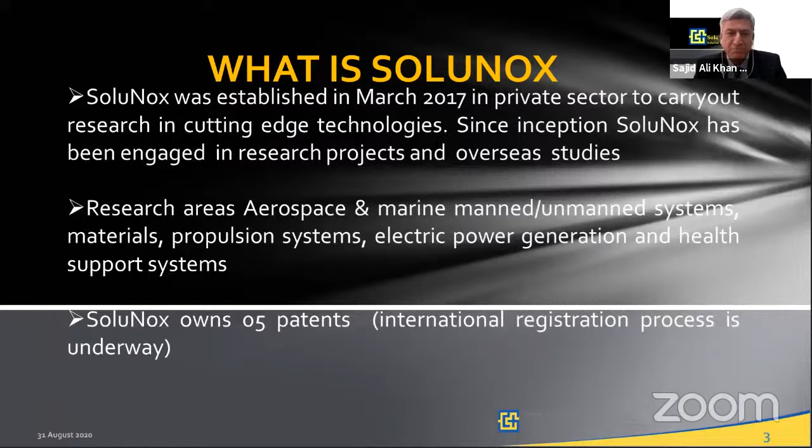SoluNox was established in March 2017 in the private sector for research in cutting-edge technologies. Since inception, SoluNox has been engaged in various research projects and overseas studies. Our main research areas are aerospace and marine unmanned systems, materials, propulsion systems, electrical power generation, and health monitoring support systems. At the moment, SoluNox owns 5 patents, and we are in the process of getting them registered internationally.

Coming to your question about how we started the process of establishing this company - before that, we were stepping into cutting-edge technologies. We had to analyze what all major companies in the related field have progressed from scratch. We studied and analyzed those companies, and collected a lot of knowledge sources of research materials, patents, and online libraries. We also took membership in professional organizations - as I mentioned earlier, we're a member of the American Society of Mechanical Engineers, American Society of Testing Materials, and the Royal Institute of Naval Architects, UK. SoluNox is also a member of 3 committees for formulation of standards at ASTM.

Moreover, to strengthen our company, we have concluded R&D collaboration agreements with universities, academia, and other companies across 3 continents. We have contracted technology partnerships, mainly strategic ones, based on sharing our research together. We are now registered as a supplier in some of the renowned aerospace directories, giving us direct access to companies globally. We have also networked into industry, since the type of industry we are working in needs a lot of precision and very dedicated design processes.

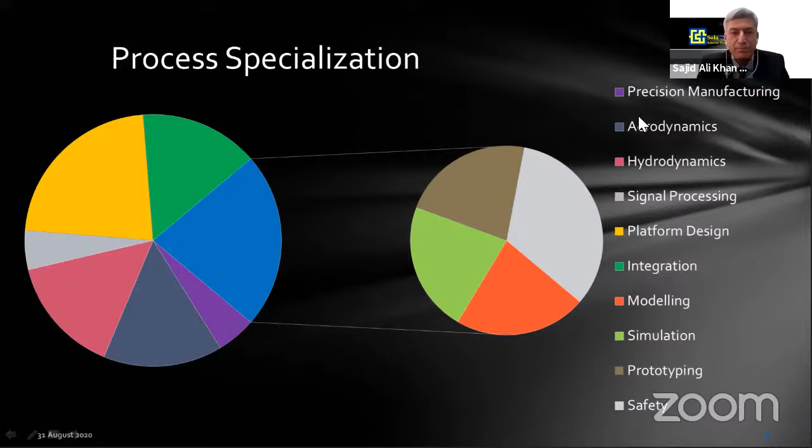Regarding some technical specifications in our process - our major products are smart products. We have focused our attention on propulsion systems, automation and control systems, and system integration. We have process specializations since we involve precision manufacturing. We have developed expertise in aerodynamics, hydrodynamics, signal processing, platform design, integration, modeling, simulation, prototyping, and in the end, most importantly, the safety of all these systems.

Now coming to your second question - how I started this process in aerospace despite being in the Navy and serving in submarines. Just for your information, I started my career as an aeronautical engineer, but somehow a turn of events took me to the Navy, and eventually I ended up getting commission in Pakistan Navy, then joining submarine service. The submarine service itself is a cutting-edge technology. So in a way, I'm working at the moment on 2 extreme technologies - aerospace and submarines. Everything else in between is mediocre technology in that sense.

As for how I came into developing gas turbines and everything - our study did not start all of a sudden. We have a team who have been working for quite some time, but in their own capacities, in gas turbine technologies or aerospace technologies. Our main effort was to bring them onto one platform under SoluNox. Specifically for the turbines, the complete process started just 6 years ago for micro gas turbines. Before that - in the next slide I'll show you the historical perspective and share how micro gas turbines evolved.

My next question will be more specifically about what micro gas turbines are. Can you please explain it for the interest of the audience who are laymen, and for someone who has a bit of knowledge about these systems? Can you also throw some light on the manufacturing process?

Just for the start, I'm sure all experienced people from aerospace are sitting here, and as you said, maybe some are not related to this engineering background. Basically, a gas turbine is a heat engine with continuous flow, in comparison to reciprocating engines which use pulsating flows. This type of engine has a compressor, a turbine, and a combustion chamber, where heat is applied through fuel injection, and new methods are coming for adding heat to the combustion chamber.

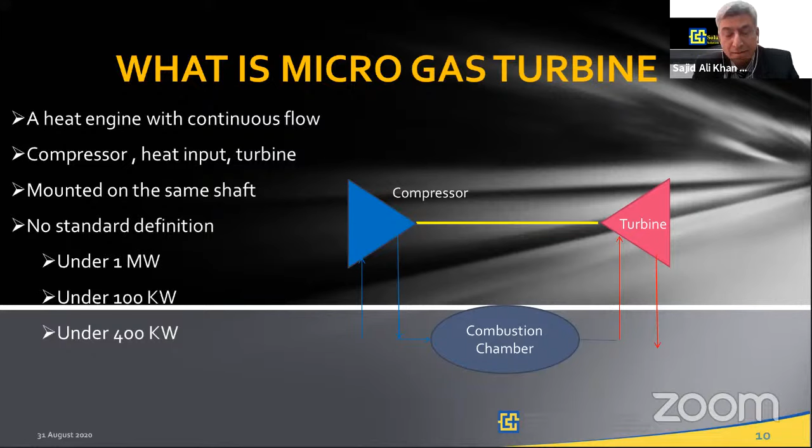In this type of engine, generally they are mounted on the same shaft. Micro gas turbines generally are mounted on the same shaft, and that is why they are popular in this part of the aerospace world. At the moment, there is no standard definition of a micro gas turbine. Initially, under 1 megawatt was considered a micro gas turbine, but this definition was subsequently worked out by many engineering associations and countries. So at the moment, a turbine under 400 kilowatts is graded as a micro gas turbine.

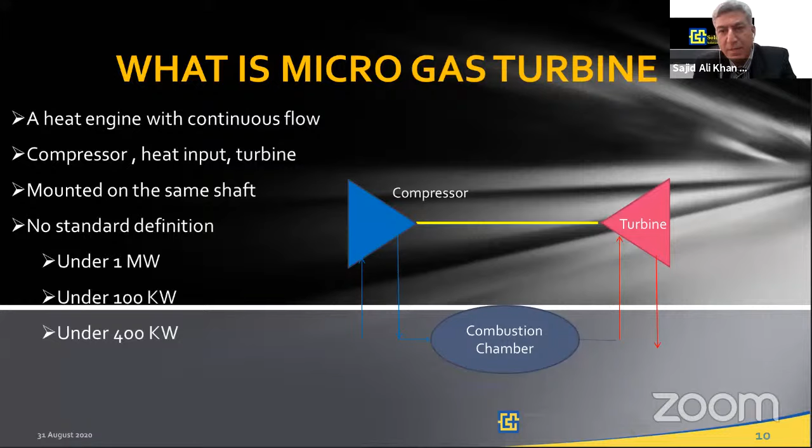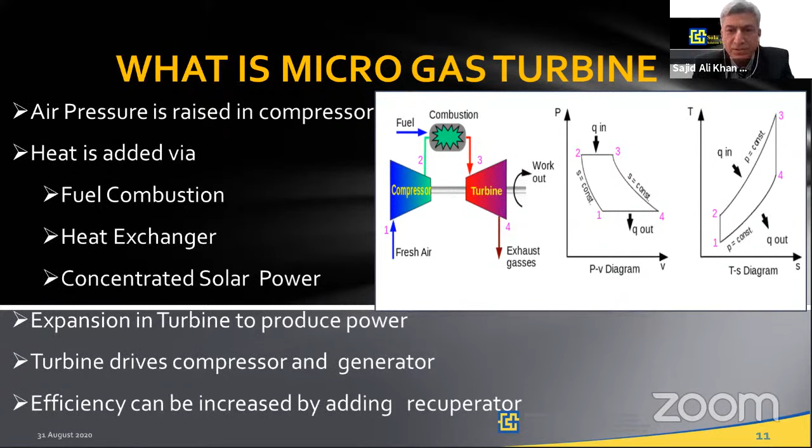This turbine drives the compressor and generator. The efficiency of these turbines can be improved by a recuperator like this on the return cycle, to increase the temperature in the combustion chamber so that fuel economy can be achieved.

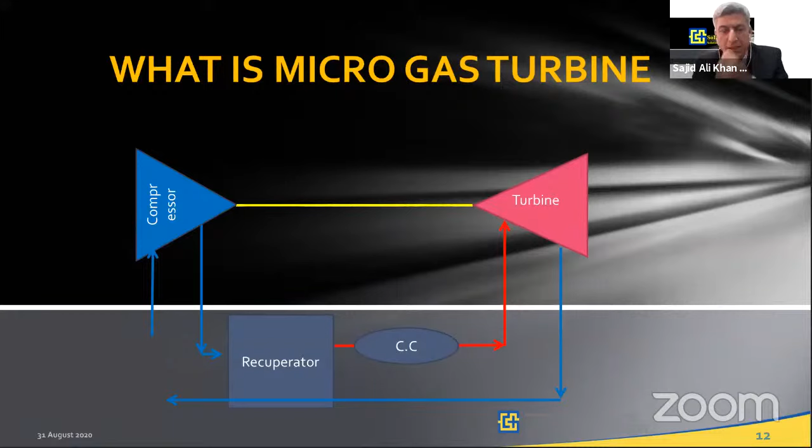Now some historic perspective related to micro gas turbines. As I said during my presentation, development started in the 1980s. It is not a new subject basically, but the drive for this development was the automotive industry, because at that time it was looking for an alternative to reciprocating engines, mainly because of the fuel flexibility, reliability, and low emissions of micro gas turbines. However, at that time, for some reason, this did not get attraction. But again, in the 1990s, use of high-speed generators evolved, and interest also developed in hybrid vehicles, where it was considered suitable.

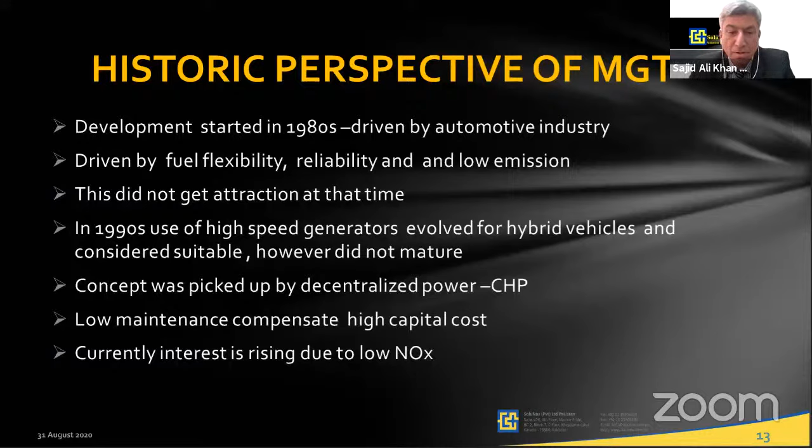Subsequently, the concept was picked up again by decentralized power in 2014, when the European Union and UNFCCC declared some standards for low emission in the atmosphere. The important part of these micro gas turbines is that they have low maintenance, which compensates for their high capital cost. Currently, interest is rising due to low NOx emissions in these gas turbines, and interest is developing now.

So the first design process starts from the Brayton cycle, and in this process, various elements of gas turbine design are finalized—generally mass flow, temperature ranges at different stations in the gas turbine, and at the same time, the selection of material is also done. Again, mind you, it is an iterative process, and continuous back-and-forth movement between the designer and the end user goes on till a suitable compromise is reached. And then you'll see that every micro gas turbine has some auxiliary systems.

This auxiliary system is again a process. It undergoes an iterative process during the design, and then engine control units which control the complete process, because these gas turbines cannot be controlled manually for sure. So to make them smart and efficient, these engine control units are becoming more smarter now.

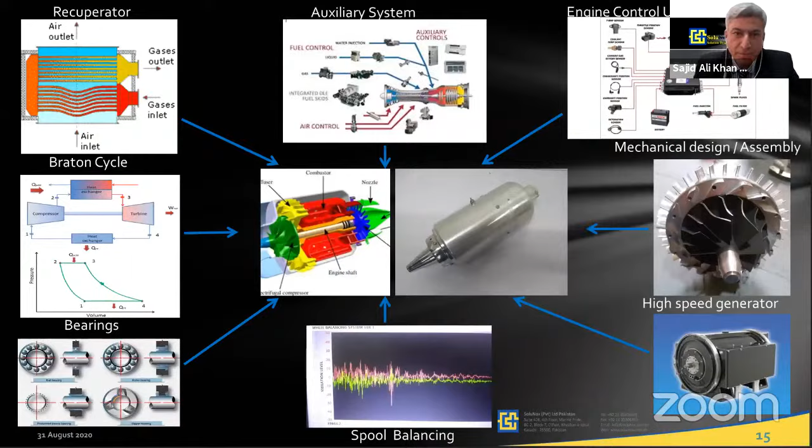Okay, now let's move to some of the parts which we manufacture in our facility.

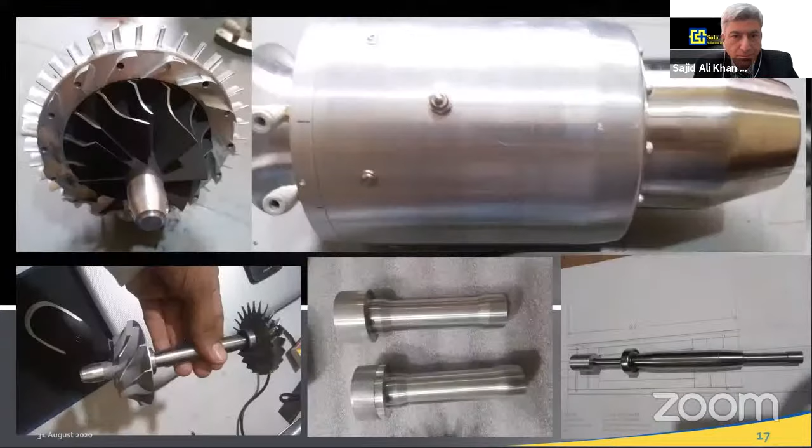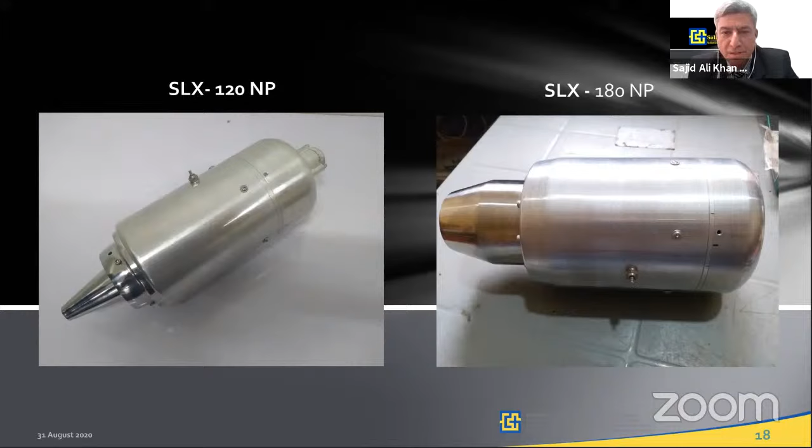These are two versions, SLX 120 NP and SLX 180 NP. They are 120 Newton and 180 Newton respectively. Our research is continuing, and we have plans to further improve these systems for relatively higher powers.

You'll see our video, you'll see it running. These technologies are already matured enough, and we also have a running engine. Our team, mashallah, has done enough good job on this, they can control this. So you were not using any kind of actuators in this process? No, correct, no. Okay, please continue. It is a thermal cycle.

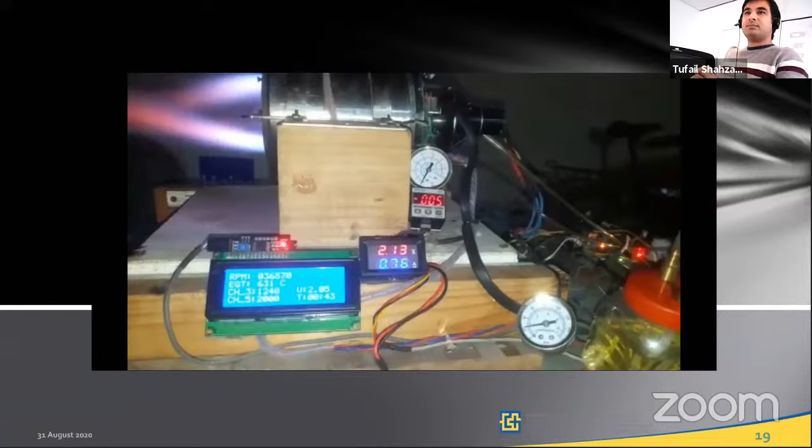Okay, thanks. So this is one of the pictures taken during a test conducted, of a running engine. You can maybe see the RPMs and the temperature in the digital display of this picture. This is just the startup, not full power. May I move now, next?

Now coming to technical specifications. We have developed 120 Newton and 180 Newton, and according to our studies we are planning to go to 800 Newton in the near future, where we can have electrical output from 3 to 500 kilowatt electrical, and thermal output from 3 to 1500 kilowatt thermal, with exhaust gas temperature up to 850 degrees centigrade. We have fuel flexibility using natural gas, sour gas, gasoline, kerosene, diesel fuel, biofuels, etc. We are targeting electrical efficiency from 23 to 40%, and total efficiency in CHP mode from 80 to 90%.

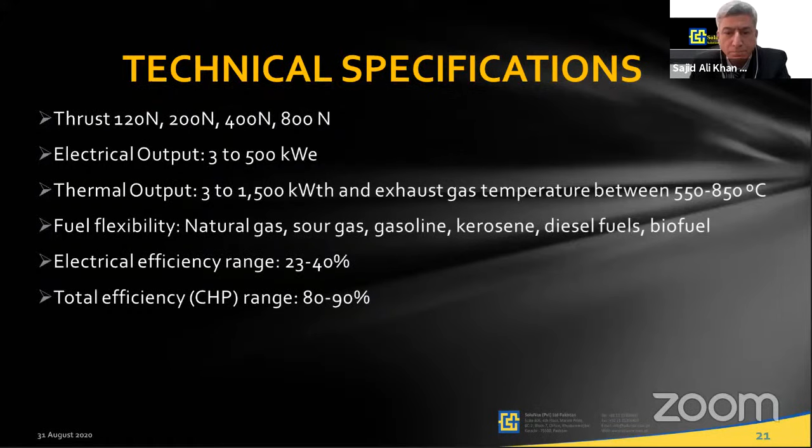Reliability and life: these turbines have been designed to work 42,000 to 80,000 hours with overhaul, and emissions targeting below 3 ppm for NOx on fossil fuels comparatively - this will be our range. The noise level we are maintaining is 50 dBA.

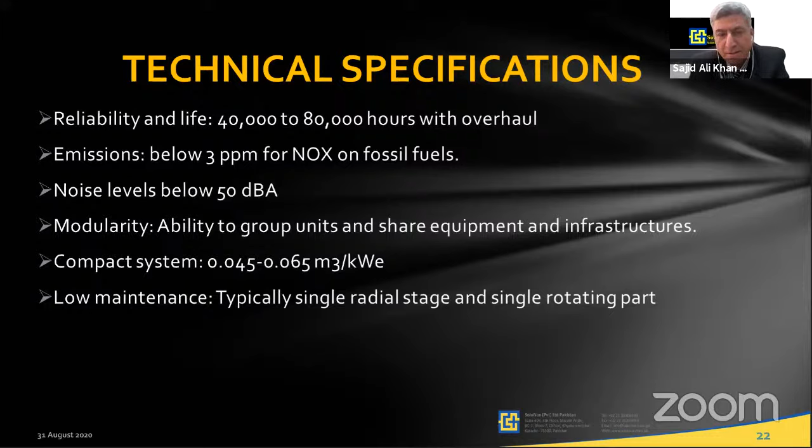These turbines are modular, and the infrastructure is also very modular, easily workable for maintenance. It's a compact system, 0.045 to 0.065 cubic meter per kilowatt electrical. These turbines are low maintenance, with a typical single radial stage and single rotating part - no moving parts. Later you'll see the type of bearings used, where there is no lubrication also.

Reliability is high because there are very few parts involved in this gas turbine, so it is very reliable and robust. Compactness comes from the high energy density, use of high-speed generators, and the turbine itself being a very small, compact system, allowing modular power up to 50 kilowatts, so you can stack up various modules to develop power in multiples of 50 kilowatts.

These have fuel flexibility, and diverse fuels can be used, from jet fuel, diesel, and biofuel. This is the most interesting part in the European Union at the moment, trying to use biofuels. But at the same time, their NOx emissions are very low, so even on diesel they are considered very low.

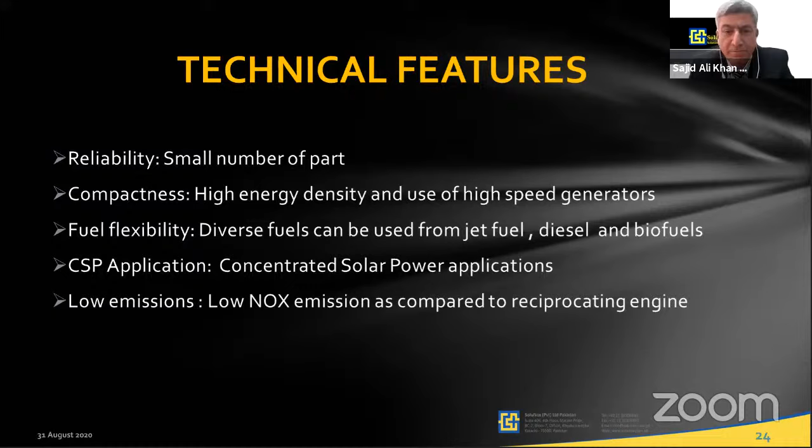The other application is CSP, concentrated solar power. In this application, a dish is used to direct sun energy onto the combustion chamber to give heat to the turbine. These are low emission turbines, low NOx compared to reciprocating engines, which is one reason the European Union and world are moving towards micro gas turbines even in renewable energy solutions. They are low noise; the combustion noise is very high frequency and can be attenuated relatively easily, and they have lower vibrations compared to reciprocating engines.

CHP mode can be used for high heat and low electrical power. It depends, because in this mode you can choose between the two - whether you want more heat load or more electrical load. You can adjust accordingly and meet the requirement of the end user.

There's another integration, with fuel cells. In integration with fuel cells, the byproduct heat is used to heat the solid fuel used in the fuel cell.

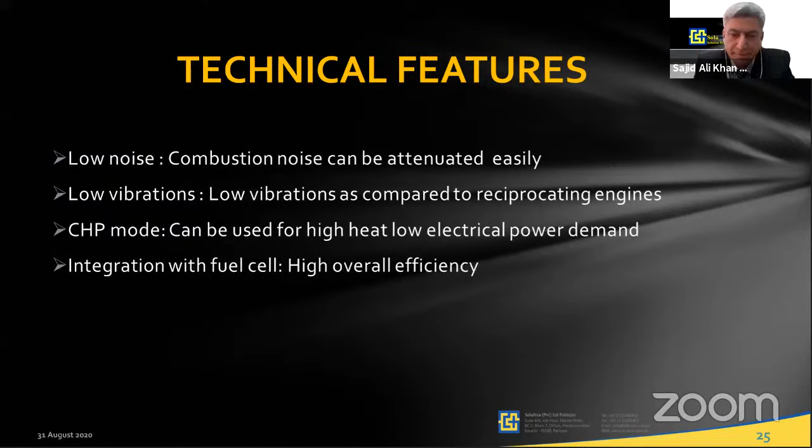The applications are combined heat and power, combined heat and cooling, and heat and power for domestic and industrial uses, and automotive range extenders. In hybrid vehicles, batteries were not considered sufficient for long endurance, so micro gas turbines are being used in hybrid vehicles to enhance their range. In future, these are going to be used in Europe for train and rail transport.

In the oil and gas sector, preventing flare is important - normally they continuously vent gas into the atmosphere, so the European Union has banned this venting of flare into the atmosphere. So micro gas turbines are being used to produce heat and electricity using that gas too - this is another application.

Concentrated solar power, as I said, uses solar power concentrated as heat on a combustion chamber, in combination of solar energy and gas turbine.

Moreover, one popular use is in small UAVs and APUs, another area where these micro gas turbines can be used. Again, due to their minimum size, these are being adopted as backup power energy instead of using batteries with renewable energy plants.

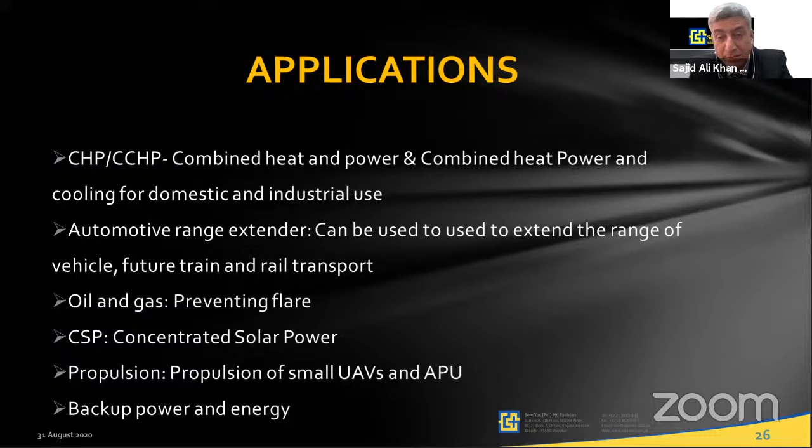So you've spoken about the micro gas turbines. What other products is your company actually working on that have export level potential?

My next few slides would indicate some pictorial views so you can have an idea of what we are actually developing beside this range: a high-speed target drone launching system.

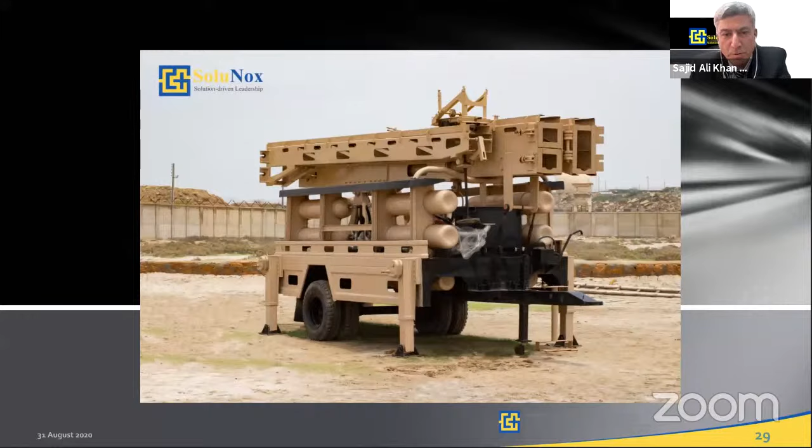This system has been designed and developed in Pakistan. The picture you are seeing at the moment is the transport mode, in the folded state, where it can be transported. Next, you will see the deployed state - the system in its deployed state.

The system has the capability to launch masses up to 150 kg at a speed of 55 meters per second. The weight of the launcher is 5,500 kg, easily deployable with 16 meter length, and transportable length of 6 meters, so it can be easily transported in a 20 foot container. This is operated with high pressure air, 150 bar, and can be deployed at sea and on land.

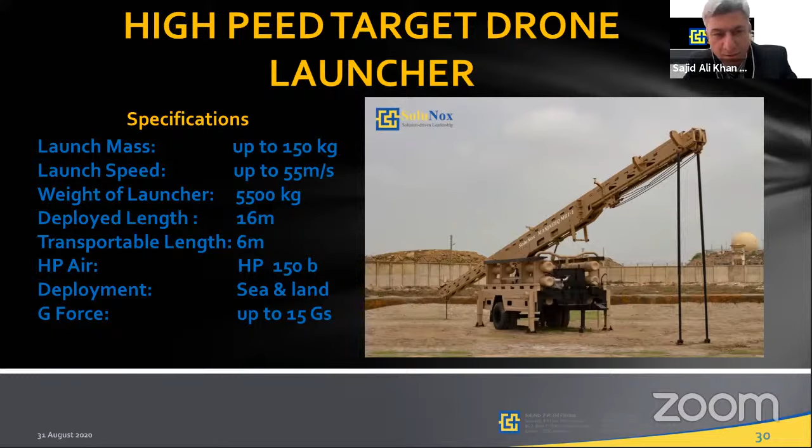This system can launch and deploy UAVs with force up to 15 Gs, controllable using our system.

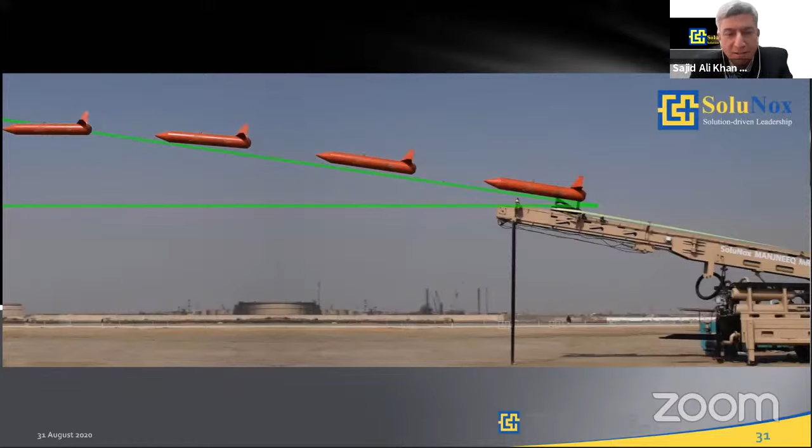This is another picture of a dummy being launched with power, just to show how much energy this system has got.

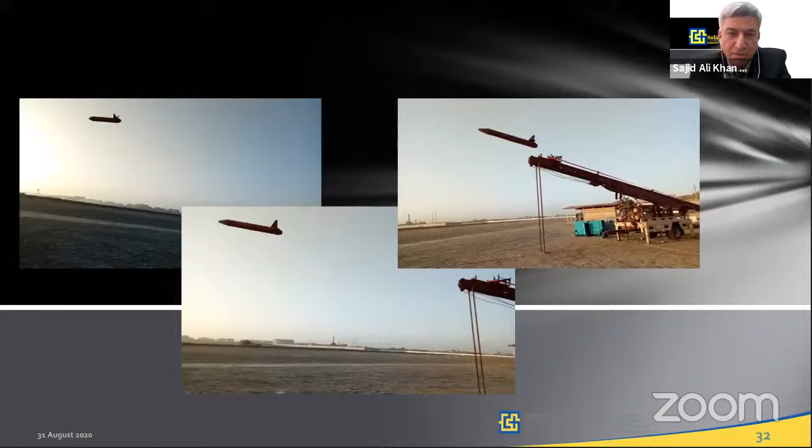We are now in high-speed target drone systems for training of pilots and for various commercial uses. It's a high-powered system that can go up to 0.4 Mach, and this system has been designed for use with our launcher.

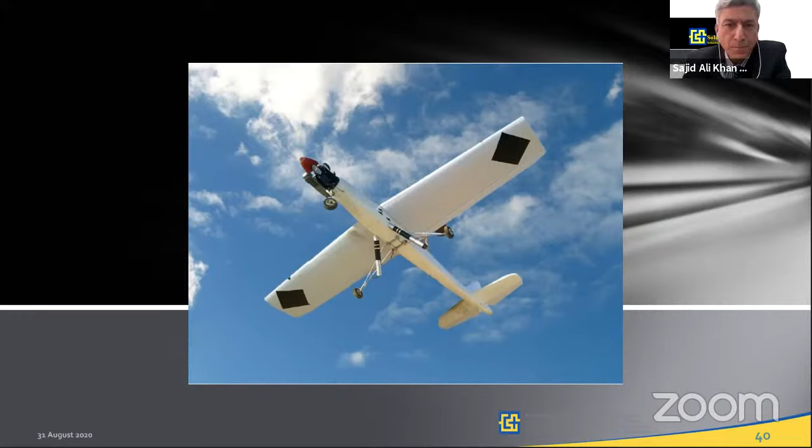This is one of the UAVs, a smaller low-speed system for IR tracking. This has unconventional wings that we developed. It's for small payload capacities, for aerial videos or pictures of a disaster area.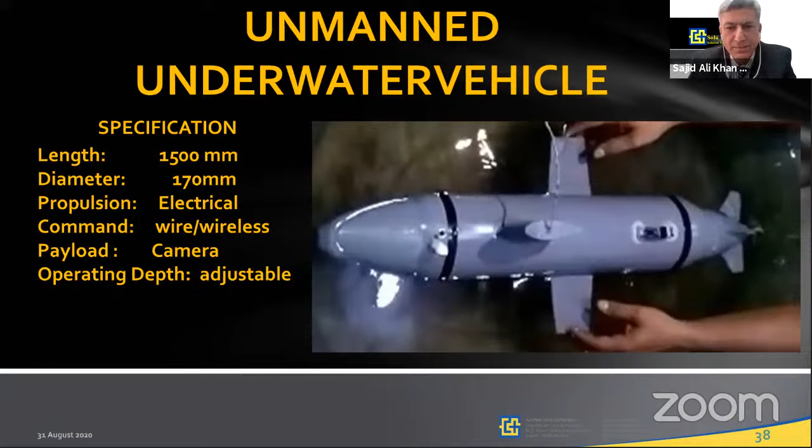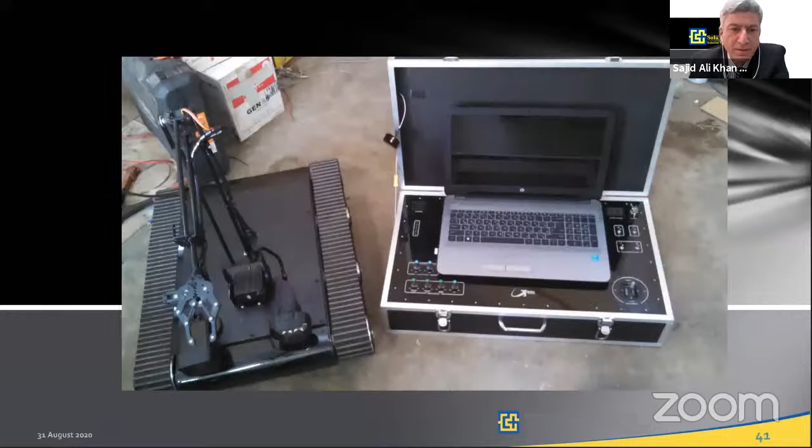This is another unmanned ground vehicle, a robot manufactured at our facility. This is autonomous and also has a camera for surveying and other activities. It can manually handle and pick up things during disaster survey of a damaged area during fire or flooding. This autonomous robot can give feedback to the end user of the system.

High strength materials - these are lightweight, high strength materials being developed. Research was done, and alhamdulillah we have developed this. Now you can see the mark to protect against high energy bullets. We have developed this locally.

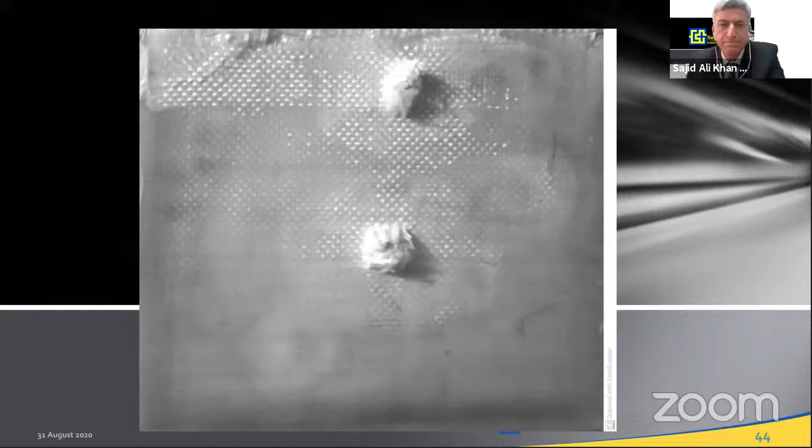You can see how the bullet has been prevented. This is the front end.

We are into some precision manufacturing. We develop connectors - you can imagine the accuracy required for these types of connectors.

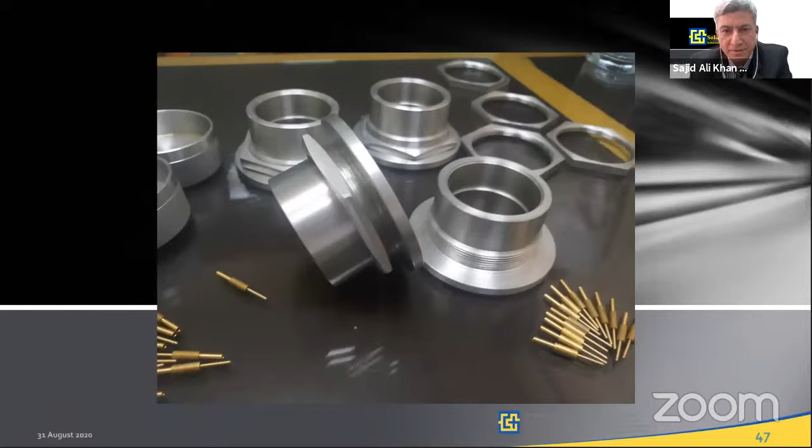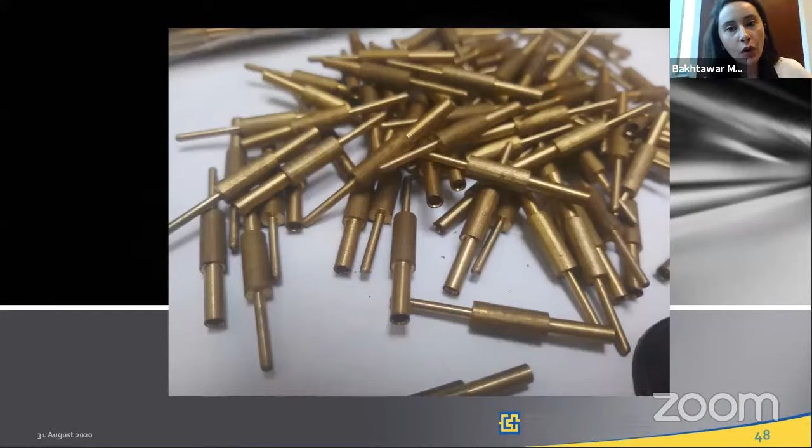I would like to ask basically what is the potential market you see for all your products, and what are the export capabilities?

Frankly, we are at the moment targeting Central and Eastern Europe, Canada, South Asian, ASEAN, Gulf, and Central Asian countries, and some of the African countries have shown interest in us, and Pakistan of course. These countries have shown interest, and for this we have participated in a few exhibitions also, so we have seen quite a good encouraging response from these countries.

Yes, and the export capabilities we have - like all our products, micro gas turbine, high-speed launching systems, automatic disarming system. This I've not displayed here, but we may show you a video for this system. This system can disarm ammunition which is expired and can be dismantled automatically.

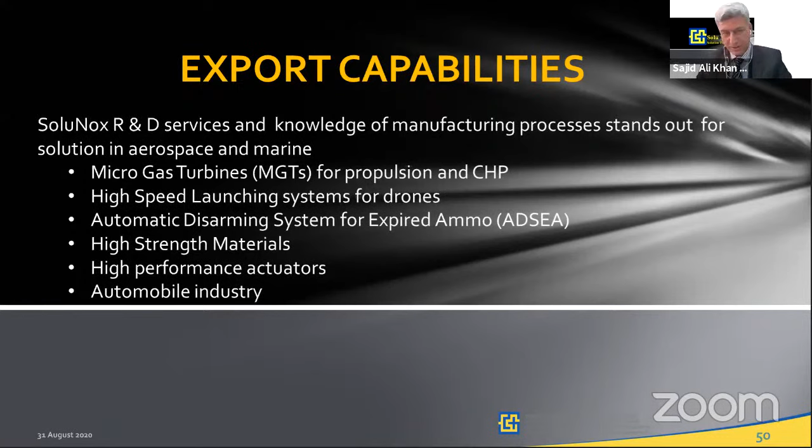Our high strength material results were very encouraging, with some companies showing interest for bulletproof jackets and materials, and high performance actuators for pneumatic systems. And in the automobile industry, we have some offshoot technologies coming out of these products applicable in the automotive industry.

So, Sajid, what is the future outlook of SoluNox, and what is your advice for venturing into new technologies in Pakistan?

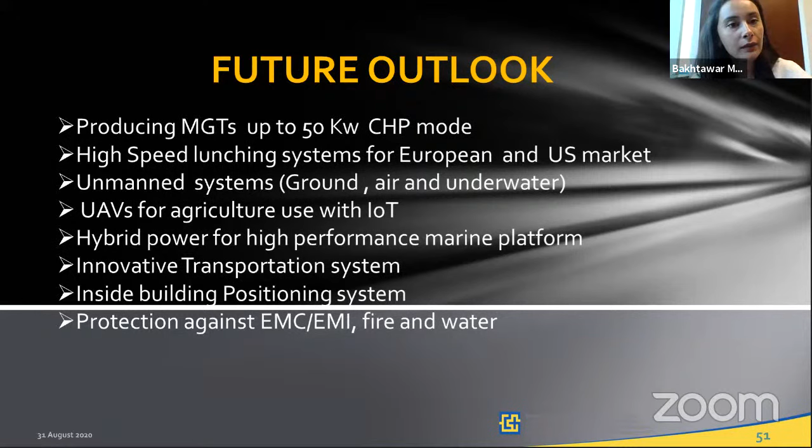Frankly, in the future outlook, we see raising the capacity of these micro gas turbines, in the CHP mode, because this is going to be the future of the world. Maybe in Pakistan it may take some time to come to this level, but Europe and Americas are focusing on it. Even Japan is focusing on these technologies.

So we are targeting these countries, and that is why we have developed our trajectory towards these technologies. We have high-speed launching systems for the European and US markets, and unmanned systems for ground, air, and underwater. We have UAVs for agriculture used with IoT, and we are targeting hybrid power for high-performance marine platforms, innovative transportation systems, indoor building positioning systems, and protection against EMC, EMI, fire and water. These are a few areas that are offshoot technologies of our research done so far.

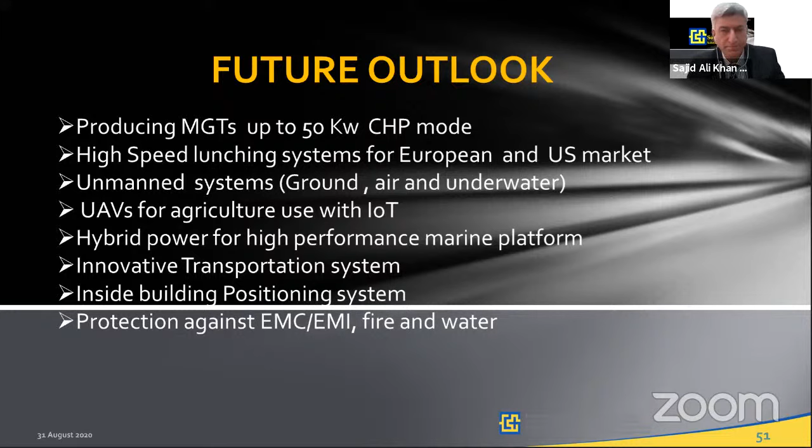Okay, so Sajid, moving towards the end of my questions from you regarding the presentation - how can the government of Pakistan help SoluNox, and what examples exist in other countries for supporting such technologies?

SoluNox research is ready to lead Pakistan towards cutting-edge technologies in the power and energy domain. This entire effort is exactly aligned with government vision. We expect, since we are already aligned, to help Pakistani administration develop this understanding of low emission, low NOx, and other areas. They may like to come in at later stages, but at the moment we at SoluNox have developed future technologies in this time period.

So what we are expecting from government or public sector organizations, if they think they want to avail our expertise in these technologies, we are ready to give our expertise gained so far, and the technologies can become an ecosystem. We can help government organizations develop this ecosystem in Pakistan, and importantly, this ecosystem should be beneficial for both parties.

We are a private entity and have used all our own resources. As I mentioned at the start, even the European Union invested 1.6 million euros only for the study to develop a gas turbine, whereas SoluNox is using its own resources to carry out this research, and today we have reached this level. So we would like to do business, of course a profitable business—I will not shy away from saying that, because we have done so much up till now. We are ready to extend our services to academia, for training and education to university students and tradesmen.

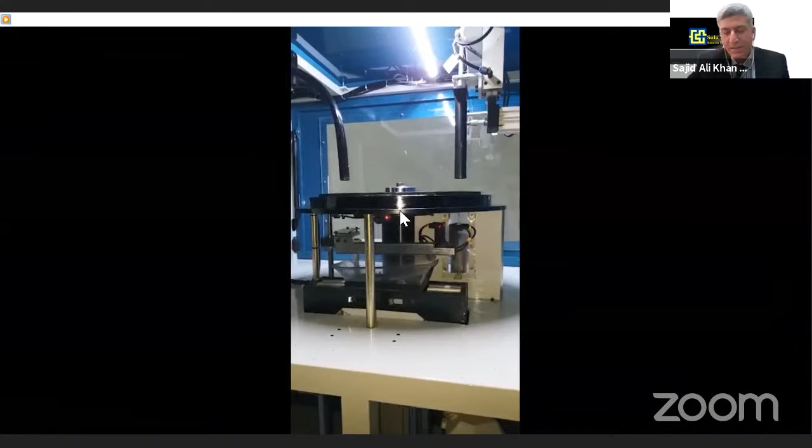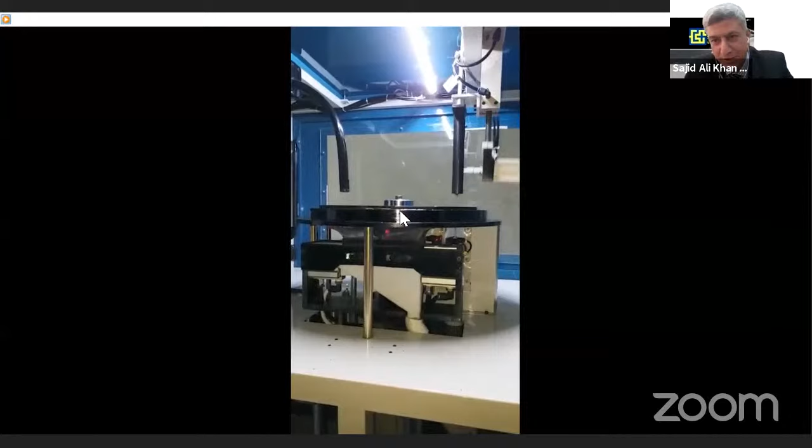This is one product we did not discuss in the presentation. This is an automatic system, totally designed and manufactured by our young, talented engineers. This system dismantles expired ammunition automatically with just the click of a button.

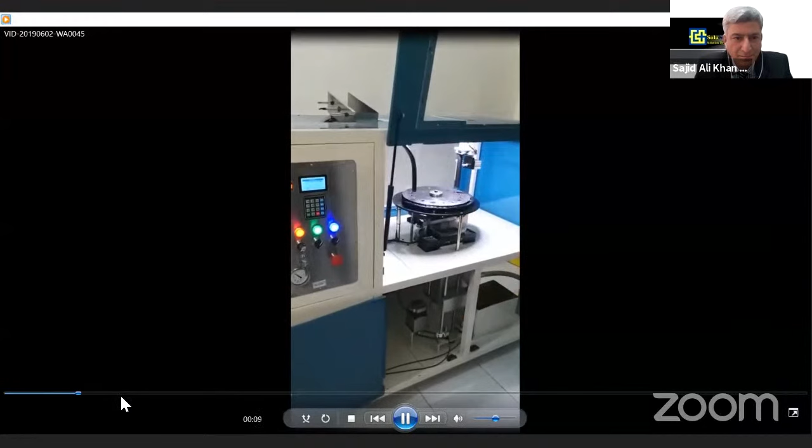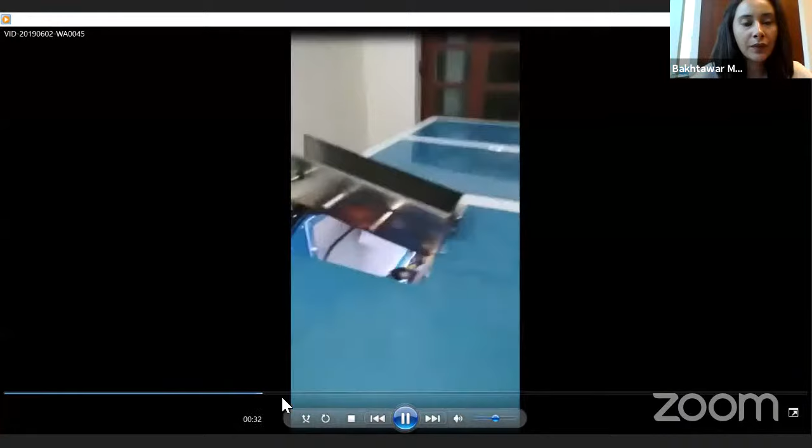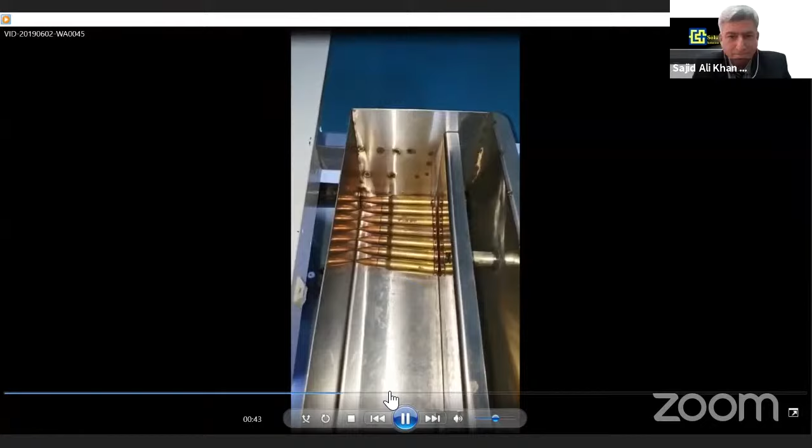So is this the same device that you were showing us? Is this the same instrument? Same, yeah.

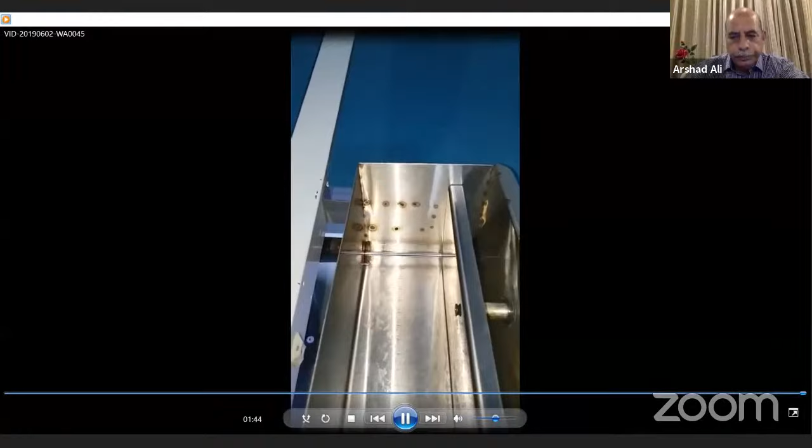You can go to the next video—now you'll see the gas turbine trial.